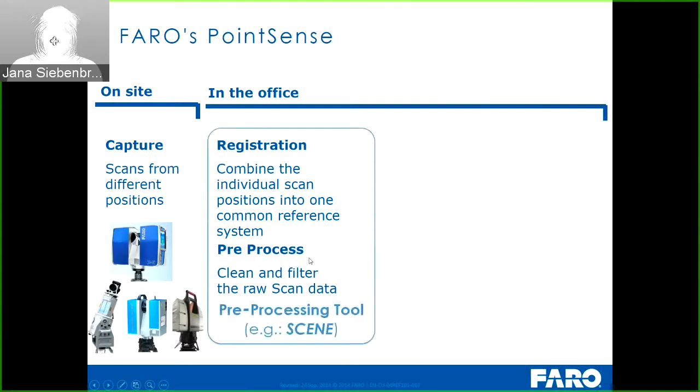So first, on site, you will capture scan data from different positions with all types of scanners, not only FARO scanners. If you're using PointSense Heritage, you may also collect your point clouds not only with laser scanners, but also with photo cameras. Relating to scans, you will in the office, or some may also already register their scans in the field. That means registration. You combine the individual scan positions into one common reference system, and also in the office you can pre-process the scan data. Pre-processing means that you clean and filter the raw scan data, and usually you would use a pre-processing tool like, for instance, FARO Scene to do so.

The post-processing means interpretation and modeling is usually done in a design tool like Revit or AutoCAD, and our PointSense is a plugin for AutoCAD. To get the data into AutoCAD and PointSense, you may directly export RCP or RCS files from FARO Scene, or you can also export E57 from any other scanner software. Or you can use Autodesk Recap in order to create RCP or RCS point cloud files from your scan data. So today we are talking about PointSense, so we are talking about interpretation and modeling of point clouds, not only from laser scans.

FARO offers various tastes or flavors of PointSense. There are some industry-specific PointSense products like PointSense Building for creation of 2D plans of buildings, like floor plans and section plans and elevations. Then we have PointSense Heritage, which combines laser scanning and photogrammetry and is mainly meant for people working in archaeology and preservation of historical sites. We do have a PointSense Plant, which will be covered in a separate webinar, as already mentioned.

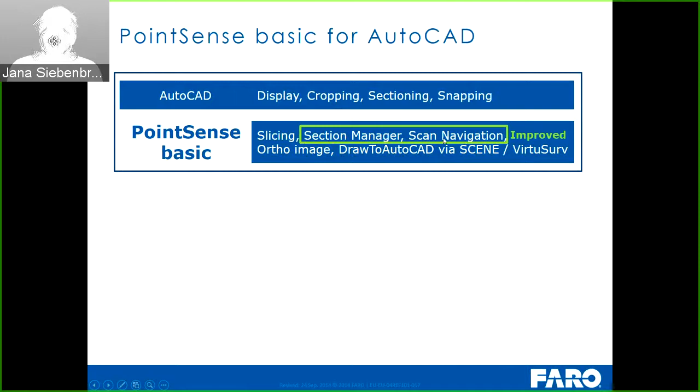We have in PointSense Pro some additional features for feature extraction, for lines, polygons, planes, cylinders, and we have also some analysis tools in PointSense Pro. And as new features, we have added to PointSense Pro the SmartSnap feature. You will learn about it in a few minutes. And we also added a fit profile feature and some deviation visualization.

And also in the industry solutions of PointSense for AutoCAD, in PointSense Building and PointSense Heritage, we added new tools. Those industry solutions contain the functionality of PointSense Basic and Pro, plus additional functionality, like here in PointSense Building, tools for creating 2D floor plans and elevations, to draw doors, windows, stairs, etc., and do some area calculation.

And as a new tool, we have a prototype for aligning wall lines. You will learn about this as well in this webinar. We also improved the tool for creating the wall lines themselves.

In PointSense Heritage, in addition to those PointSense Pro tools, you get tools for stereo photogrammetry and for creation of image plans by unwrapping colorized point clouds into the plane. You will learn about this tool also in this webinar. We did some improvements there. They are not new tools. We have them for quite a while now.

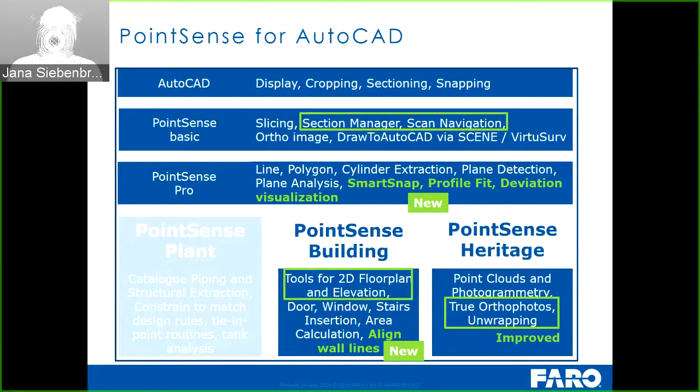It does not support AutoCAD LT because we are relying on the native point cloud engine of AutoCAD, and LT does not have such an engine. All right. So far about the brief overview. Let's have a look at the new features and their benefits for you.

The first feature I like to mention is the SmartSnap, which is really new in version 17.5. It works like the known AutoCAD object snaps. With it, you can precisely snap to planes, corners, and edges of a point cloud. And we also have options to snap to the highest or lowest point within a certain search radius. The benefit for you is that SmartSnap allows you to draw and model the as-is situation much easier. You have far fewer clicks for getting corners and edges.

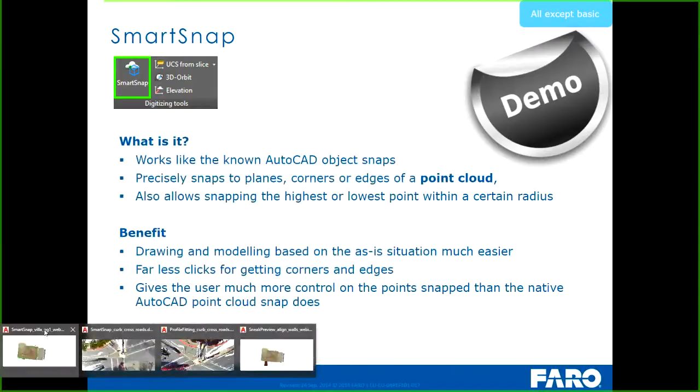It's nice to have this extra visualization to show you where the selected point is before you accept it as a point that you want to use. Yeah, right. And to give you a feeling for what the SmartSnap feature looks like, I'd like to demonstrate briefly directly inside AutoCAD. Okay, we switch to AutoCAD. So here you can see a point cloud, a scan of two rooms.

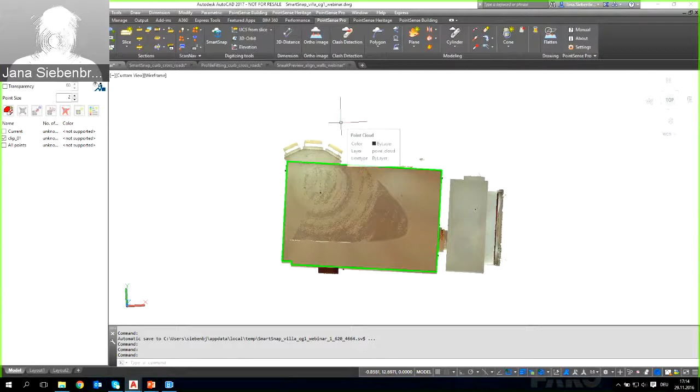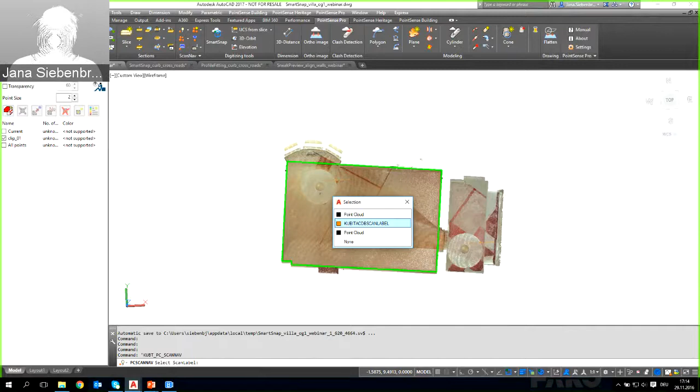I have already digitized the ceiling outline of the left room, and besides the SmartSnap tool I'd like to show you an improvement we made when switching to scan navigation. If I click on it, the point cloud becomes transparent, so it's far easier to click the scan label of the scan position I want to view in perspective. So here we have our scan data in the so-called scan navigation mode, where you look at your object from the scanner position. Now I'd like to digitize the outline of this window recess.

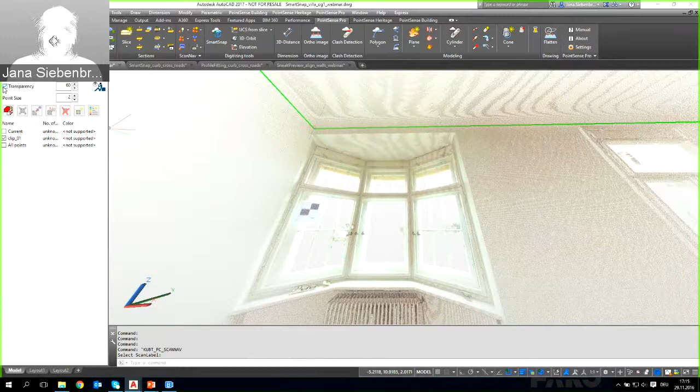One more thing I'd like to show you is a smaller improvement in the section manager, which some of you might know already. There you can turn on transparency whenever you need to. Here you can see the line that I have already digitized. For digitization of the recess, I will turn transparency off again, and I will start the new SmartSnap tool.

By running the tool, you will get an additional toolbar for the SmartSnap, where you can turn it on and off using this button. You can also change between auto mode and manual mode. We have different types of snapping modes, like point to plane, corner point, edges and corners, or only edge points, and highest and lowest. Let's digitize the recess using the edge and corner snap.

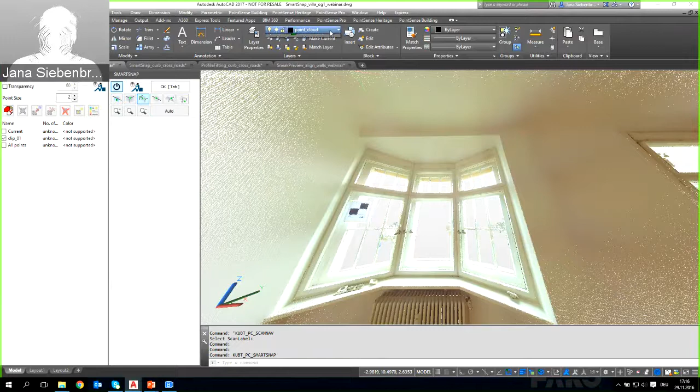I would just draw a line to outline the recess. Let me just enable a colorful layer, and I start the line command, and you can see at my cursor I now have a circle around my mouse cursor, which represents the search radius. I can scroll it smaller and larger, just to analyze the points within a certain area.

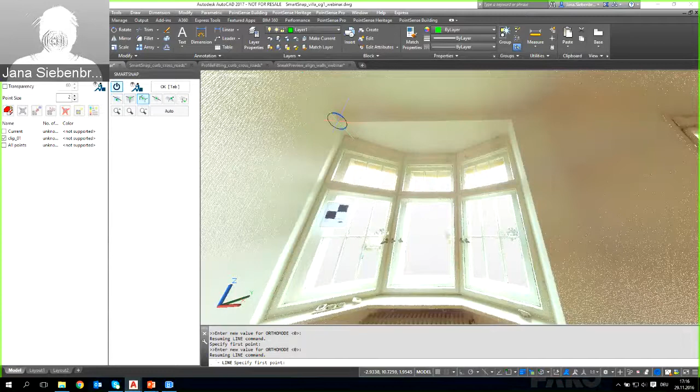And when I click near the edge or the corner point here, I get a visualization where I can check. The green point would be the point which I would get if I used auto mode, but the blue points show me some alternatives which I can check in 3 different views. I think this one looks quite good in all 3 views, and you get additional axes that help you judge the quality of the proposed point.

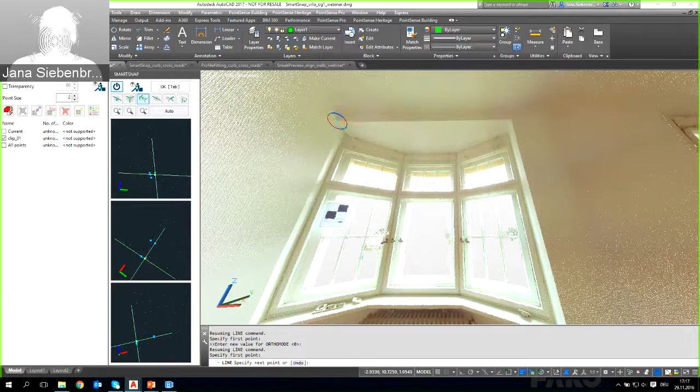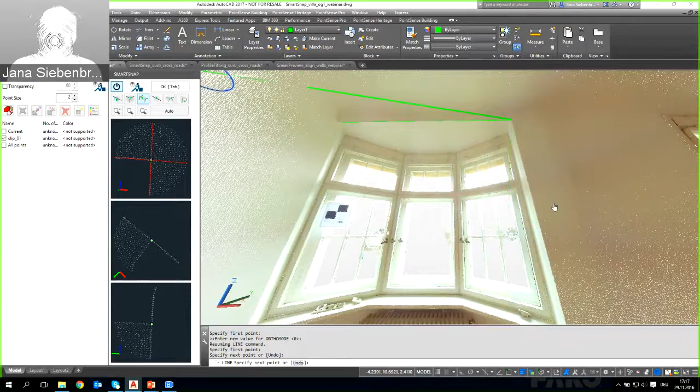And if I think this is the correct one, I can just click on OK or use the tab button on my keyboard, and you see the line was snapped to that point, and I proceed with the next corner over here. Again, we can check. To me, it looks pretty good already. Let's see how this looks. Well, maybe even better. So I confirm, and I could continue down here and see what happens.

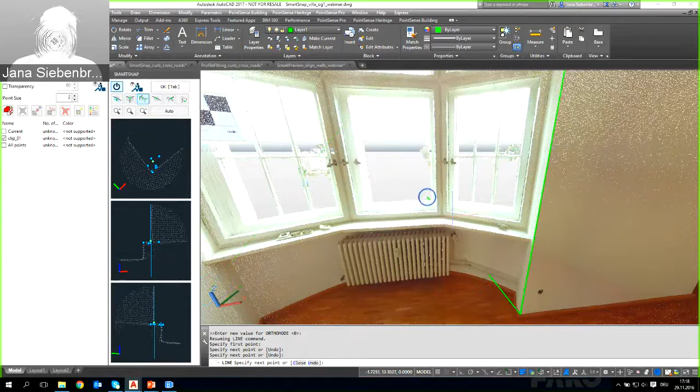This is a little bit more complicated situation down here, but still I would like to get a point very close to here. This looks okay to me, and I can confirm here. So I think you get an idea of the usefulness of the edge and corner point snap.

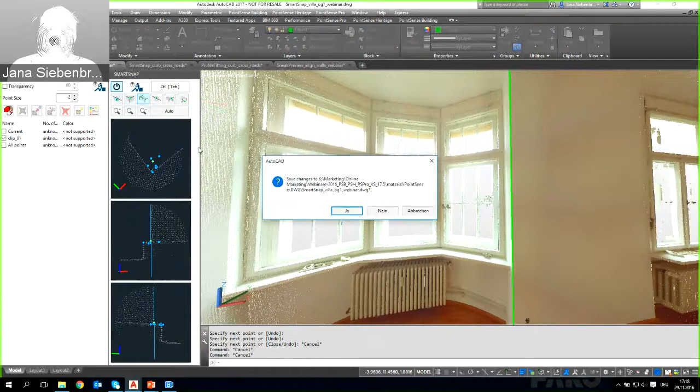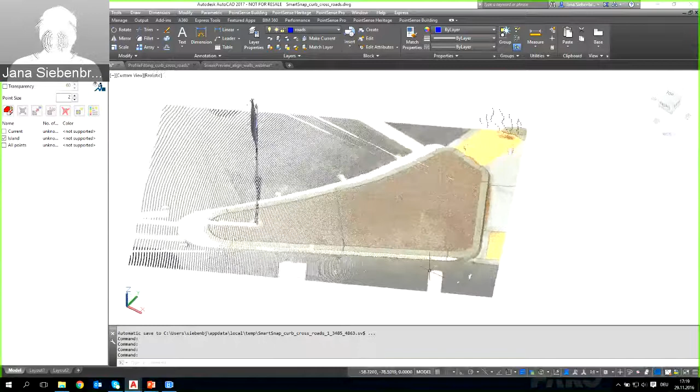Let me show you. We have 2 more options, like highest and lowest point snap. I will demonstrate these on a different example. Let me just close this drawing. Here we have scan data of a road cross section, and what I'd like to digitize is the bottom line of this curb using the SmartSnap. So I run the tool again.

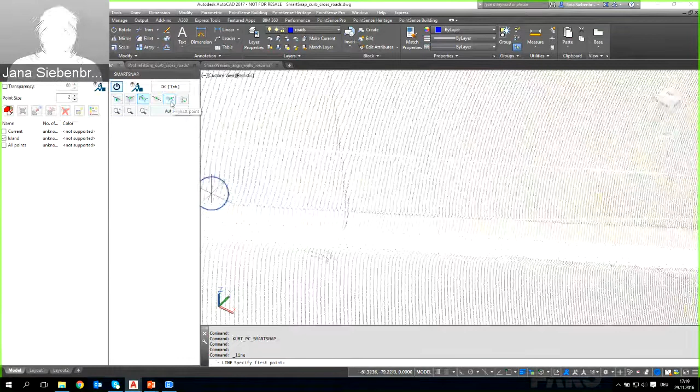I will start the line command once more, and I would need to snap to the lowest point within my search radius. So I enable the lowest point snap, and we have 2 options: the projected lowest point and the real lowest point. So now the projected lowest point is enabled, and this is also what I really need. Let me just increase the search radius a little bit.

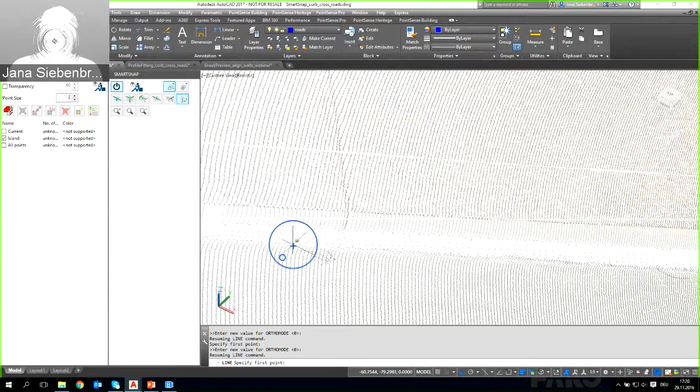You can see a small blue cross inside my search radius, and you can also see a little circle. The little circle shows me the point with the lowest Z value within my search radius, while the blue cross shows me the point where I get my XY coordinates from. So I get the Z coordinate from the point with the small circle, and the XY coordinate from the point with the cross. So I can start drawing along here.

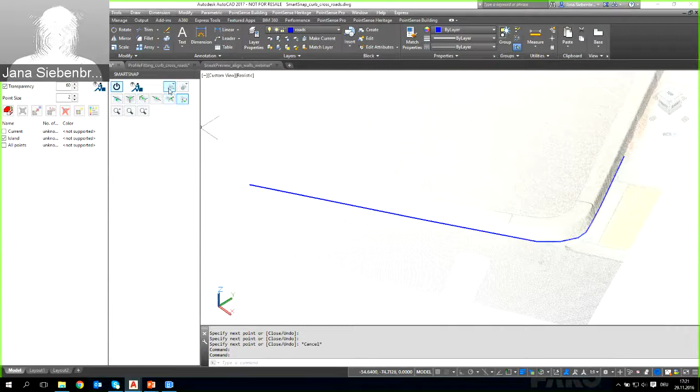Oops, I want to pan. Just click roughly around this corner. Quite straight on over here. Okay, I think that's enough for you to get the idea. We turn it a little bit more transparent, so you can see how easy it is to draw the bottom line of a curb. The same way I could do with the top of the curb using the highest point snap, projected highest point.

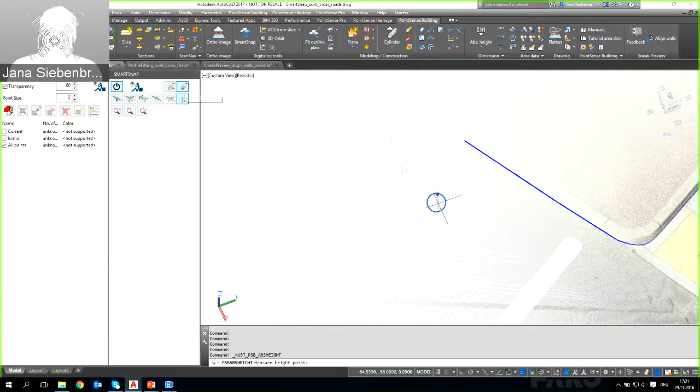I'd also like to show you how you can use the other mode, with the real lowest point. If you for instance want to know in a certain area of the road where the water will run to, you can, for instance from PointSense Building, start the labeling tool for heights or elevations, and with the SmartSnap real lowest point enabled, you can see that the symbol changes a little bit.

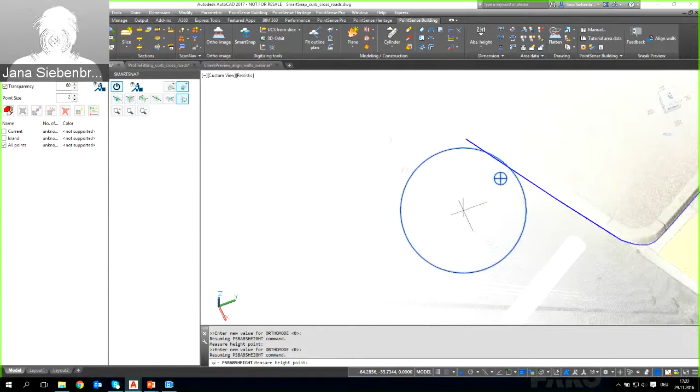The small blue cross is directly inside the small blue circle, which means that you get the X and Y as well as the Z coordinate from the lowest point within that larger search radius. So if I want to analyze a larger area, I can enlarge the search radius, and my height annotation will be put to that snap point.

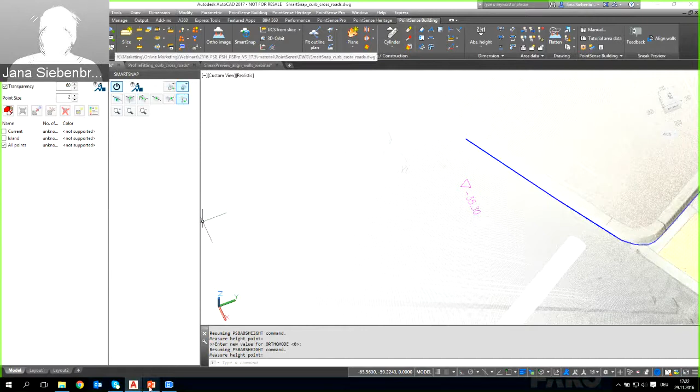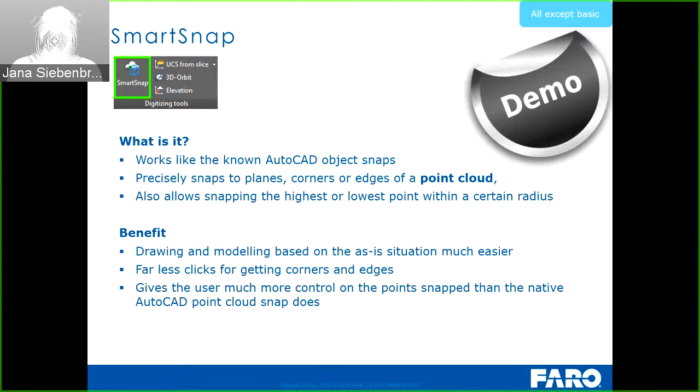Okay, I think that should give you an idea of the SmartSnap tool. I will just continue with the next feature, which is also new in version 17.5 of PointSense. It's included in all PointSense solutions except PointSense Basic.

It does fit 3D profiles along a point cloud, and shall help you model all types of profiles in 3D, like the 3D model of a curb or of ornaments, or even steel beams that bend. You can model those beams with this tool as well.

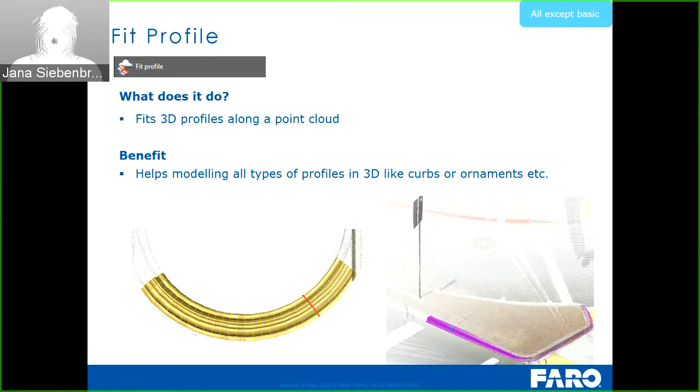Yes, I was going to mention the steel beams if you didn't. I had a customer that needed that, and it worked very well for them. Yet another application where I found it useful was digitizing railway ties. We had a customer with an electrical substation with train tracks going through, and we were able to model it very well with this tool. Ah, cool. Good.

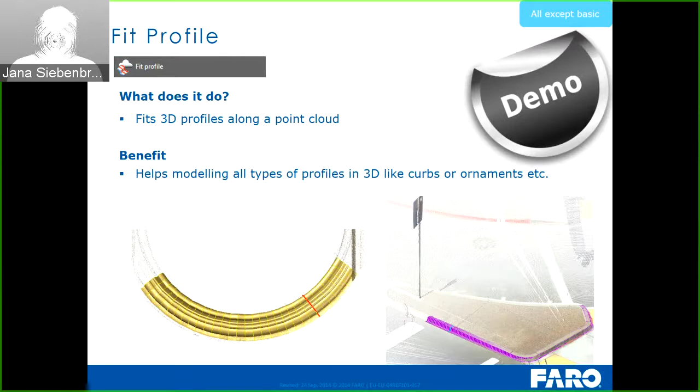So I will just go back to AutoCAD to give you a brief introduction to that tool. It's really easy to use.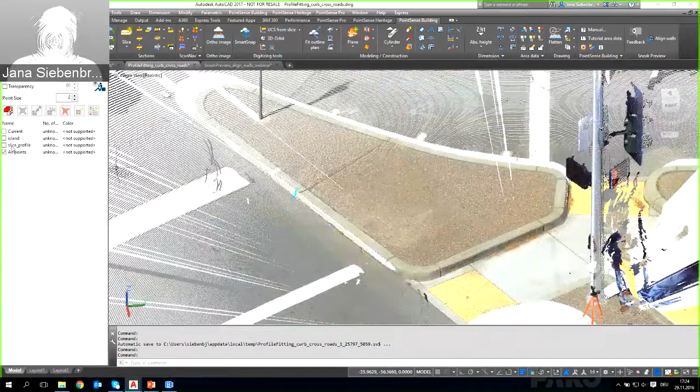In here, it's the same road cross section example, but this time we don't want just the lines of the curb, we want to model this curb in 3D. What I did in preparation was create a slice through the point cloud and digitize the profile, the cross-section profile of the curb. That's what you need before you start.

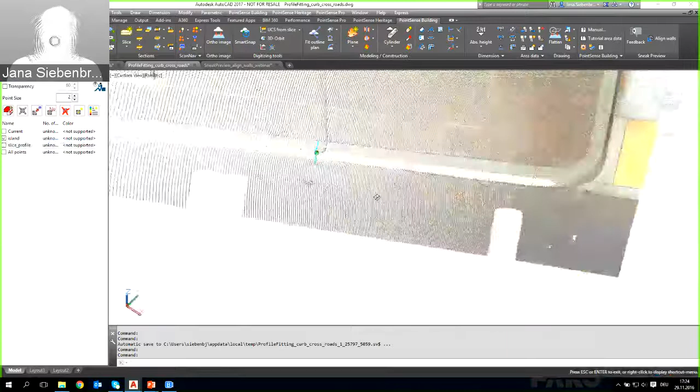Having prepared this, I can run this command in PointSense Building. You find it here. In PointSense Pro, it's hidden in this pull-down menu. The dialog works a bit like a wizard, so the first thing you have to do is select the cross-section profile. Here you have a small sketch that helps you understand what's being asked.

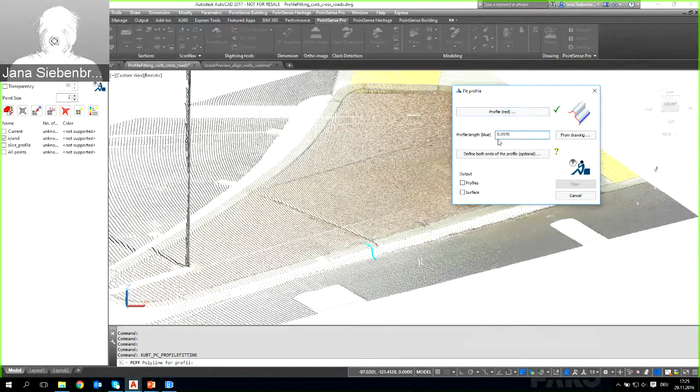As soon as I've selected the profile, we're back in the dialog with a check mark here. The profile length is a parameter where you can control the fitting accuracy. The smaller the profile length, the better you get around curved parts of the 3D profile, like this curved part of the curb. I would just leave it as it is, given by the software in relation to the red cross-section profile.

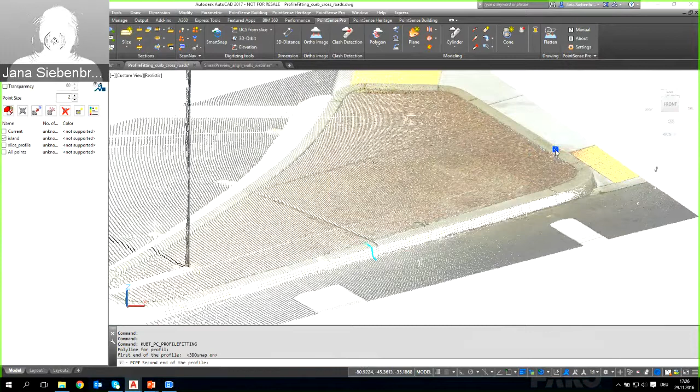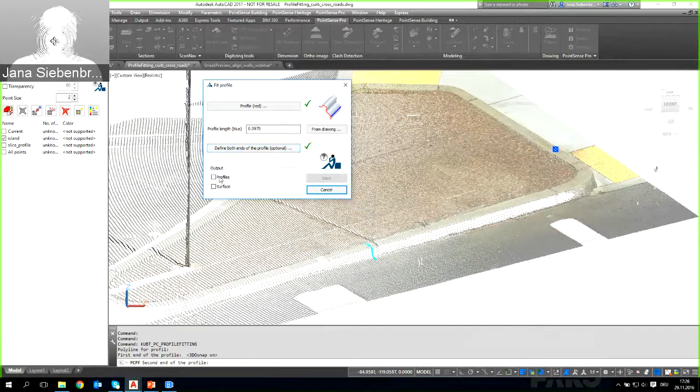What you can also do is define ends of the resulting 3D profile. You can snap a point cloud starting point here and an end point over there. If you don't define an end point and starting point, the tool will just go along the point cloud as far as it finds an area where the profile might fit, and you can stop the fitting by pressing escape at any time.

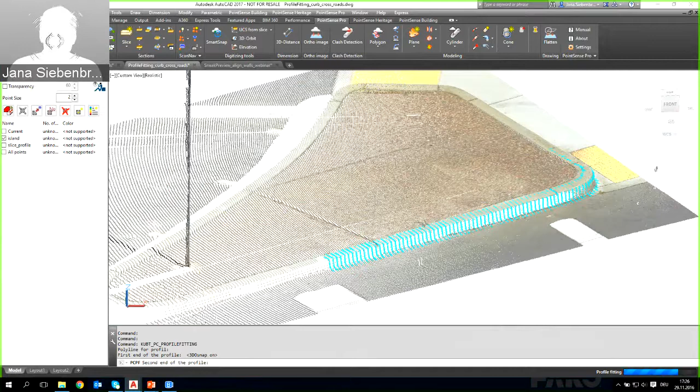The output we want to create, for demonstration here, is profile lines as well as the final 3D surface. I just click start, and you can see this is really real time—the profiles are fitted very quickly. It starts in one direction, and once it reaches the endpoint, somewhere around the corner there, it will continue to the other direction of the selected cross section.

Now I'm asked to delete any profiles which I don't need. I could select some profiles over here which I don't want to use to create the 3D surface. In this example, all the cross sections fit very nicely, so I could keep them. But in some cases, if you don't define a start and end point, additional profiles might be created that you don't want to use for creating the surface. Therefore, we have this option to delete some of the profile lines.

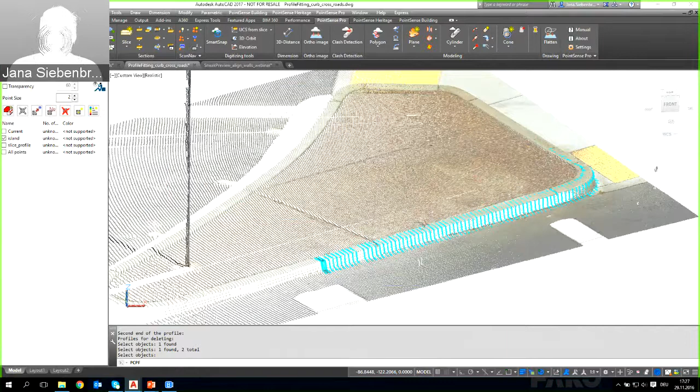And now you see this was also real time. In just a few seconds, the tool creates a 3D surface from all these profiles, and you have the curb in 3D. All right.

I will not demonstrate this tool, it's pretty easy. You just select the surface, the geometry objects that represent the surface, and then select the point cloud, and it calculates a new point cloud which is then colorized by deviations, and you get a legend in the end. It's very similar to our existing planar analysis tools, and the results are pretty much the same. But what I like about it is that you can model anything you want or need in the point cloud, and then compare that model to the point cloud.

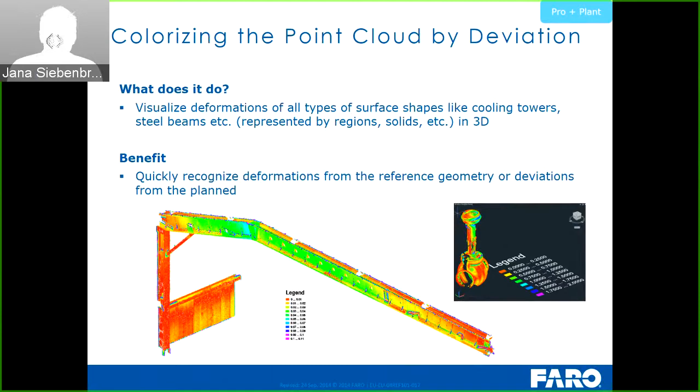Another one of the completely new features in PointSense is the Align Walls feature, which we only have in PointSense Building. And so far, this feature is just a prototype.

In PointSense Building, we introduced a new feature group called Sneak Preview. This is a category collecting prototype features we think are good enough to let you try them and give us feedback. The sneak preview features are your chance to participate in early developments at FARO in PointSense, benefit early from new developments, and influence the future functionality by your feedback. That's mainly what the new sneak preview is.

The first tool we've added to the sneak preview group is Align Walls. As the name suggests, it's intelligent automatic alignment of wall lines inside floor plans. Your benefit is that you get quickly architectural type plans with parallel wall lines and rooms with square corners, and also rooms and walls that are axially aligned.

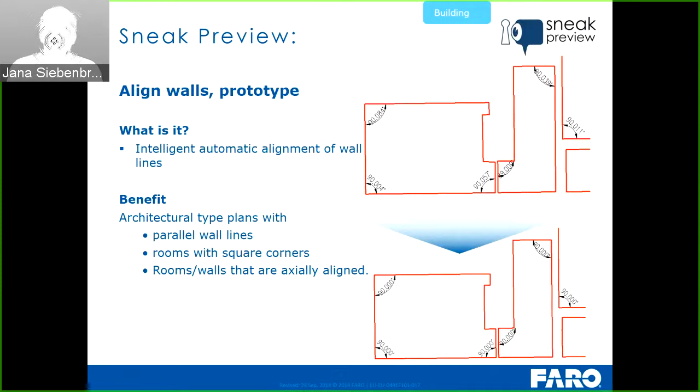The tool works as follows: first you select all the lines that you want to align or make perpendicular, and the tool analyzes those lines and polylines and determines the reference directions, then aligns the lines with these reference directions within a customizable tolerance.

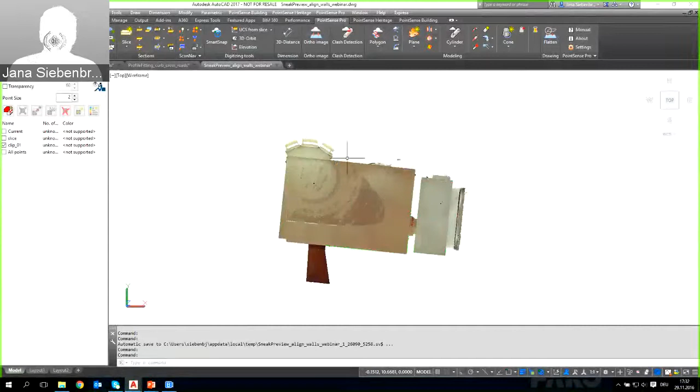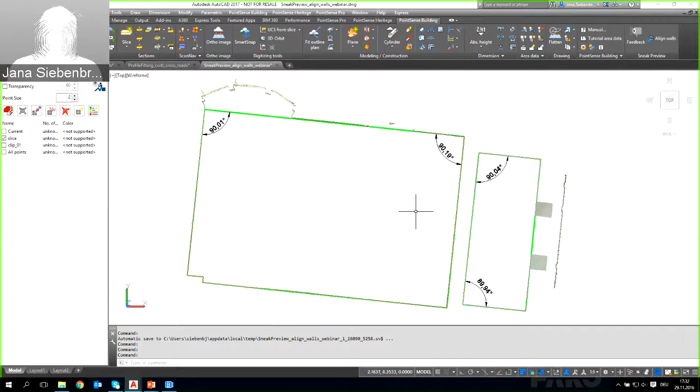Best to give you an idea of the tool with a demonstration. We go back to AutoCAD here. We have our two scanned rooms, and the workflow would be that you first create a slice of your point cloud and digitize the wall lines. Before you add doors and windows, you would want to align the wall lines and apply constraints like square corners for the rooms, and that's what we can do.

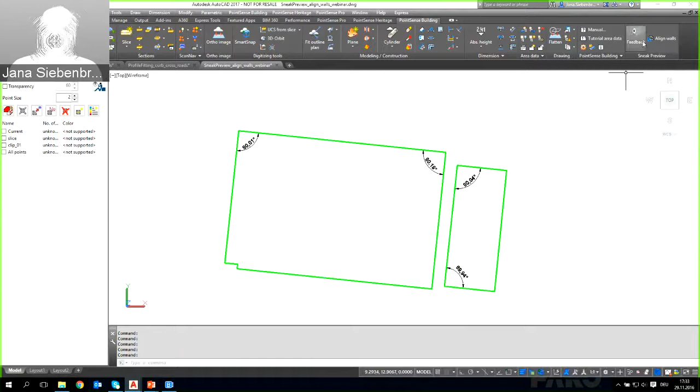I have put in some annotations here, and you can see the room corners are not square right now. Using the new Align Walls tool, you select those lines, press enter to confirm the selection, and then you can set increment angles for the alignment. The default is 90 degrees, but you could also apply constraints like 45 degree angles between the wall lines.

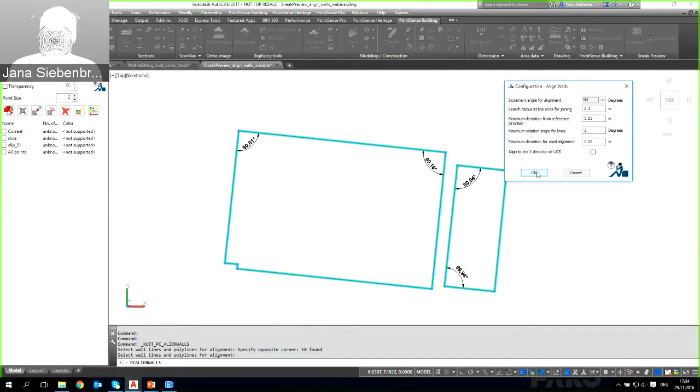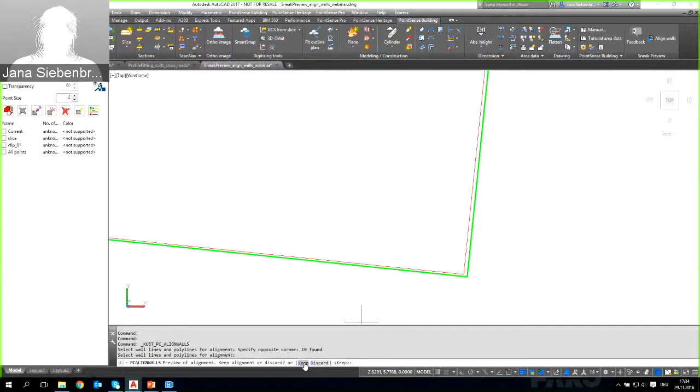You have various parameters to adjust the wall alignment, like the maximum deviation for axial alignment of wall lines, which is especially of interest if you have outer scans of the outer side of a building's wall, for instance. I'll just hit OK here, and in the command line you're then asked - in the drawing you'll see the proposed adjusted lines in red, and you have the option to keep or discard them. I want to keep them, of course, and you can see now we have new lines.

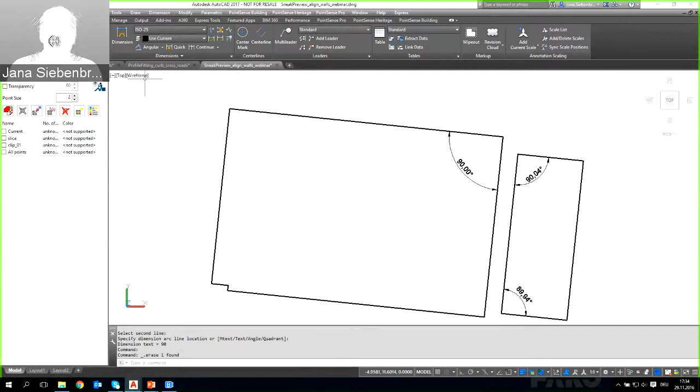They are black. Let me delete the annotation over here, go to annotate, and put in the new angular annotation, and you can see this corner is square now, as well as this one over here. Same with all the other corners. I will not put the annotations in here. So this is mainly what this tool does.

After applying these constraints, you can continue adding doors or windows or even stairs, depending on what you need inside your floor plan.

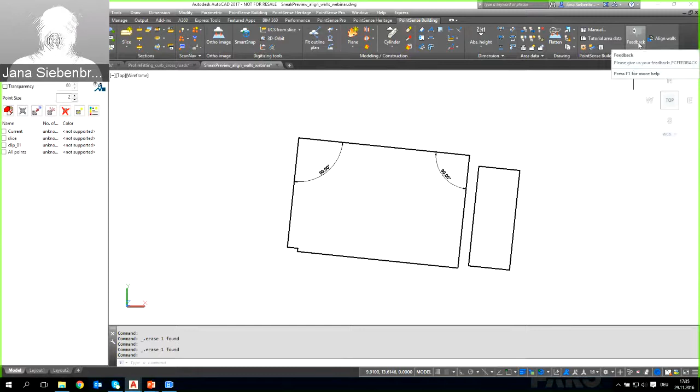With the new sneak preview, you also have the option to give feedback. Let me show you this briefly. If you hit the feedback button, you'll get to a web page where you can leave your feedback on the particular sneak preview feature. For now, we only have the Align Wall Lines feature where you can give feedback on.

What else have we done to improve PointSense?

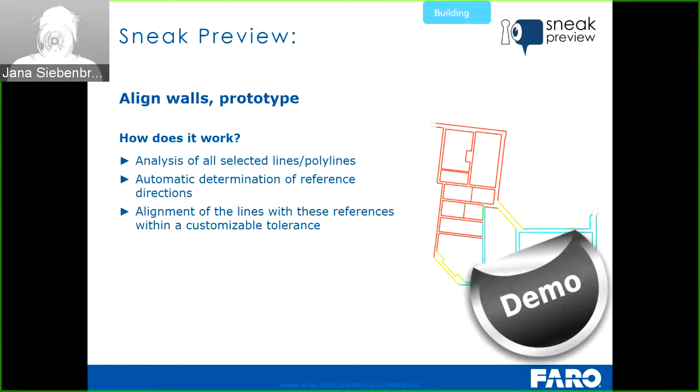We improved PointSense Heritage, specifically the creation of image plans. For unwinding point clouds and images and the calculation of true orthophotos, we have increased the speed - the calculations were quite slow before. You also need fewer clicks because we now directly support RCP and RCS point clouds - you don't have to create a smart section first, you can directly select your RCP file to unwind it. Also the visual quality of the results has been improved.

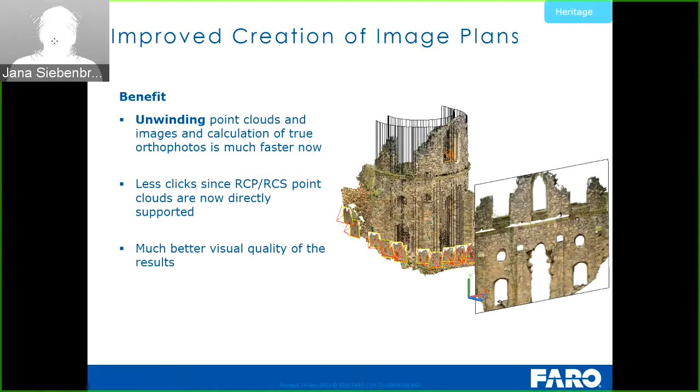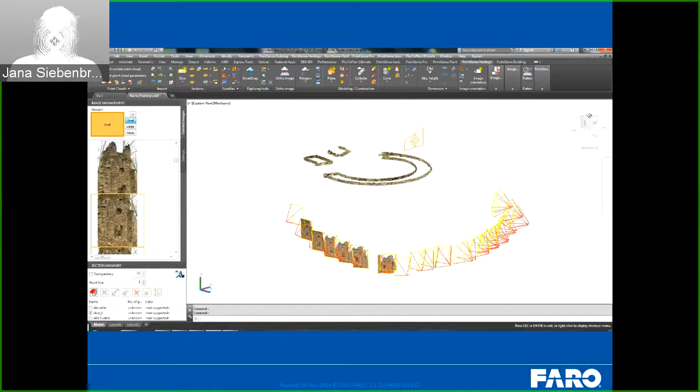Because calculation still takes longer than one or two minutes, I've prepared a video to give you an idea of how the unwinding feature works. Some of you might already know it. Before you can unwind anything, you have to create a projection surface for the photographs or for the points of the colored point cloud. So we defined a slice and fit a polyline to this point cloud slice.

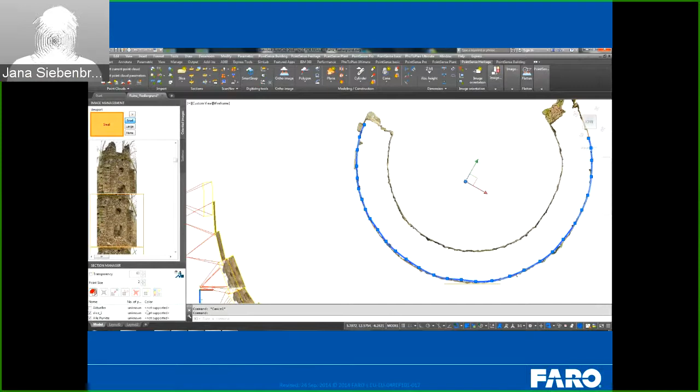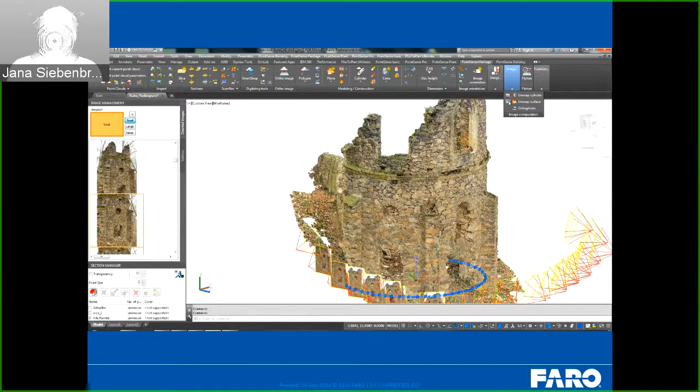This is in time-lapse mode. Once we fitted the polyline, we can use this to create a 3D surface from a 2D polyline using a PointSense Heritage tool called Edit Prismatic Surface. So we select the polyline, click an upper and lower point, and we have the projection surface.

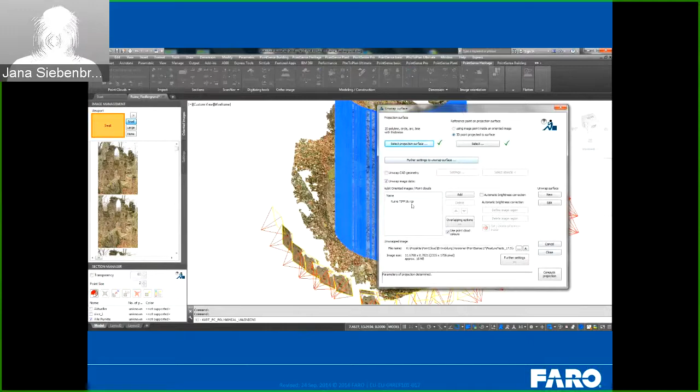Then we can run the Unwrap Surface command from PointSense Heritage. You need to select the projection surface - that's been done here already - and you can see the RCP point cloud has been selected. When you run the calculation, you get a result like this, which looks pretty good, I think. Having created a true-to-scale, true-to-length image plan, you can of course use AutoCAD tools to annotate, do measurements, and maybe draw a vectorized facade plan on top.

Another improvement, which I already demonstrated when I talked about SmartSnap, is that in our section manager we now have a transparency option and also an option to change the point size without needing to select the point cloud explicitly. You can turn the point cloud on, transparency on and off while you are drawing and modeling, and this helps a lot with modeling. It's much faster to have the tools right there on the side of your model space, and be able to change that in the middle of any command without breaking the command.

Another improvement with the help of transparency, which I already demonstrated, is when you want to turn on scan navigation, the point cloud automatically gets temporarily transparent, so you can much more easily select the scan labels of the scan positions.

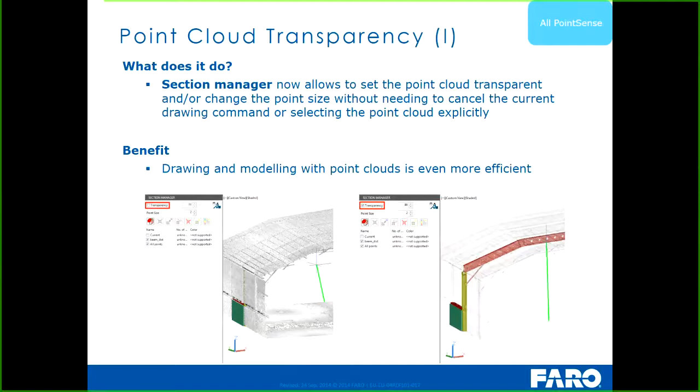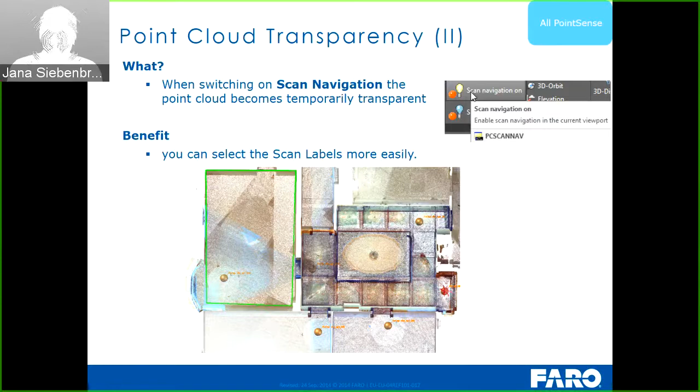We also now have the possibility to explode the scan labels, for users that for any reason need a scan map. For somebody who doesn't have PointSense inside AutoCAD, or who is using a different CAD like BricsCAD, and you want to provide them with a map of the scan positions, you can create the scan positions in PointSense and then explode them and export the DWG or DXF file with the labels represented as standard CAD geometry.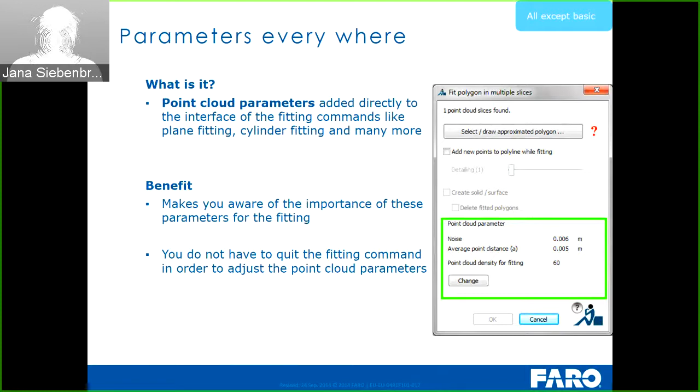Another improvement we've done to PointSense is that we put the point cloud parameters directly into the fitting and pattern recognition tools, like plane fitting, cylinder fitting, and many more fitting commands. You'll have the point cloud parameters directly in there. It helps you be more aware that these point cloud parameters matter for the fitting results, and you don't have to leave the fitting tool if you feel like you need to adjust the point cloud parameters for a certain area you're working on. You can adjust those parameters directly from inside your fitting tool, which is quite handy.

We also revised and improved the old fit outline plan command. This is a command that helps you draw the outlines of walls with the help of point cloud sections, point cloud slices. But not only with point cloud slices - now it's also possible to draw wall outlines with the help of scan navigation. It offers more options, like forced perpendicular or 45-degree wall lines, and works more efficiently. If you try it out, you'll recognize you need far fewer clicks than in the previous version of this tool.

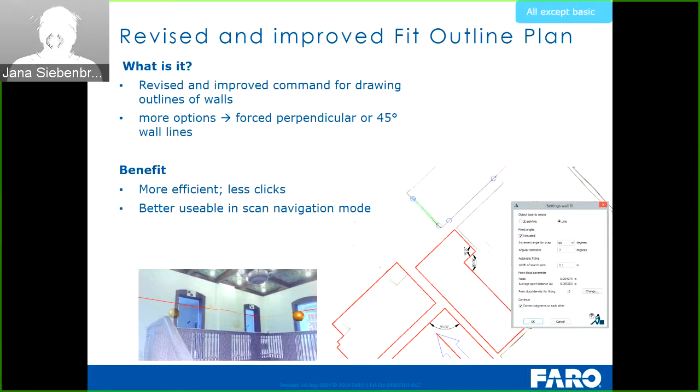On user request, we also made various improvements to our analyzer tools, like the plane analyzer. You'll now find options for labeling the highest and lowest deviating point from a reference surface, which you can see in this cyan colored annotation. We also added a checkbox in the dialog for the square grid, so you don't need to enter two grid lengths, just one, if you want square cells for your analyzer grid. Also new are green and yellow labels for the rows and columns of the grid, which correspond to the cell numbers in the ASCII file you can export with the analyzer tool - these labels help you better find correspondences within the deviation table from the ASCII file.

This is a great improvement to help find or tie in data that's outside of CAD, perhaps in an Excel file, and help engineers find out physically where that would be, let's say on a wall surface. Very helpful in the paneling industry, also good for any sort of flatness analysis like concrete analysis.

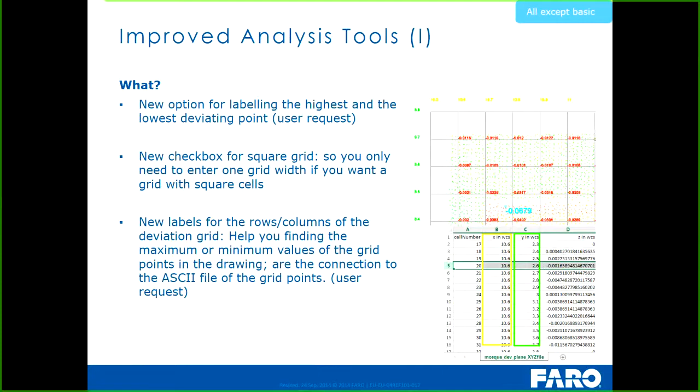Another improvement in the analyzer tool is that we now provide the option to organize your results more easily. We've prepared configuration tools to define layers to put the different analysis results on, and you can define the names of those layers where the grid, points, or lines, etc. shall be put.

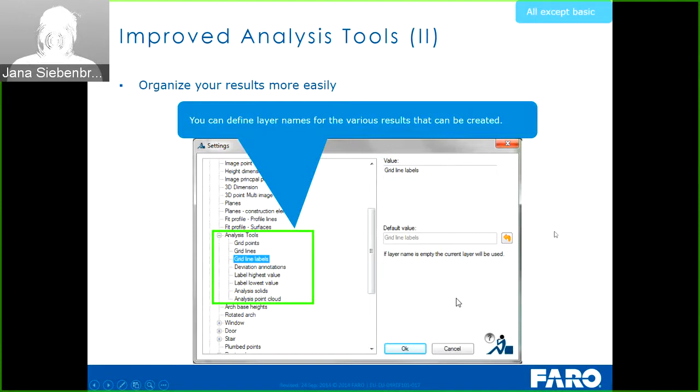Then we've made some improvements on user requests to two of the plane tools: the fitting tool for one-click planes, and the automatic grow tool.

We have included two new command line options that help to change the search radius around the click point without needing to go into the parameter dialog. And inside the parameter dialog, we added options for limited and unlimited plane over here, which makes the tool a little bit more flexible on the results created. And another thing we added is the option to create or not create sections when you use these tools.

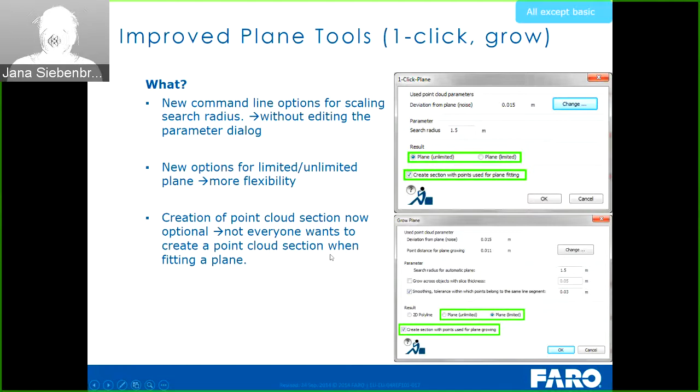Previously, we did not have the option. Both tools always created point cloud sections in the section manager, and if you use the tools very often, the section manager could become very crowded. So if you don't want those sections to be created, you can now uncheck this option, and your section manager will stay clean and uncrowded.

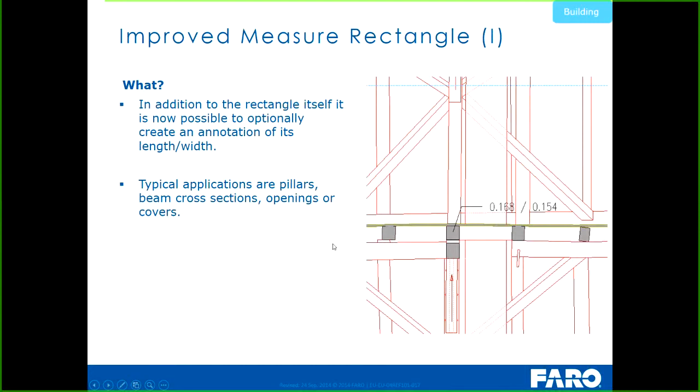Then, in PointSense Building, we did some improvements to the tool for measuring rectangles. So now, in addition to the rectangle itself, you can create annotations of the width and the length of that rectangle you created, which comes quite handy when you draw pillars or beam cross sections or openings or covers or anything which is rectangular. Okay, those were the features which I wanted to introduce to you today.

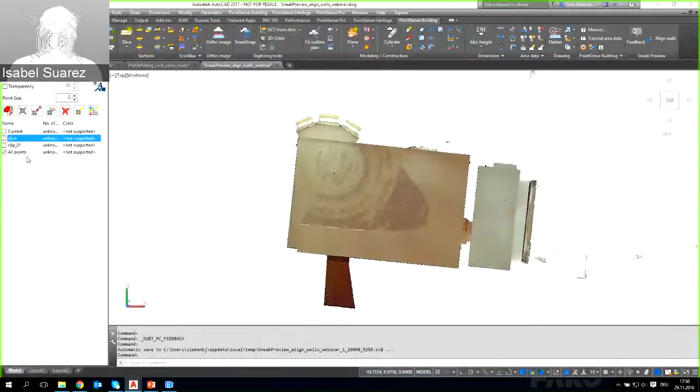May I see an example of multiple slice? Multiple slice. It wasn't one of the new features, it's one of the existing tools. I believe we have a video of that online, but if you want to show it, you can, or we can send a video. Yeah, I think it's easiest to send a video, but multiple slice. Let me just go to the clip here. And multiple slice is hidden in the drop down over here.

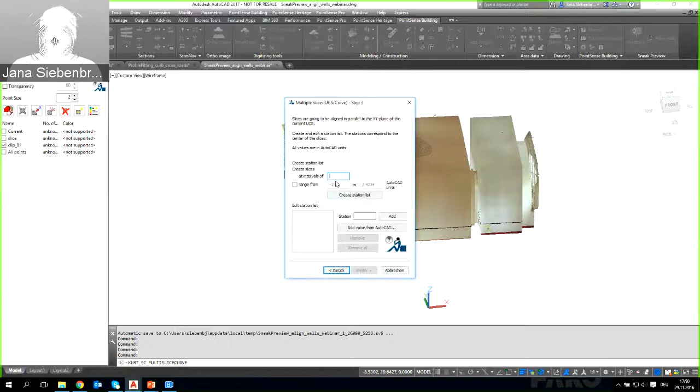And you can decide whether to apply it on the visible section only, and we will just create multiple slices parallel to the XY plane for demonstration here. And we can add intervals, to make it not too many, let's say 0.5 meter, or maybe just 1 meter, to give you an idea of how it's working. Create a station list. Can even adjust things here.

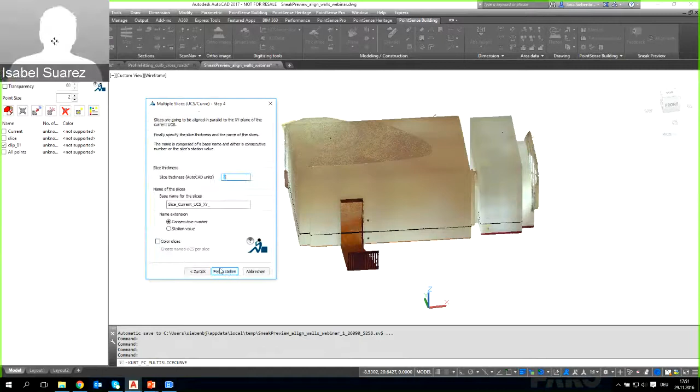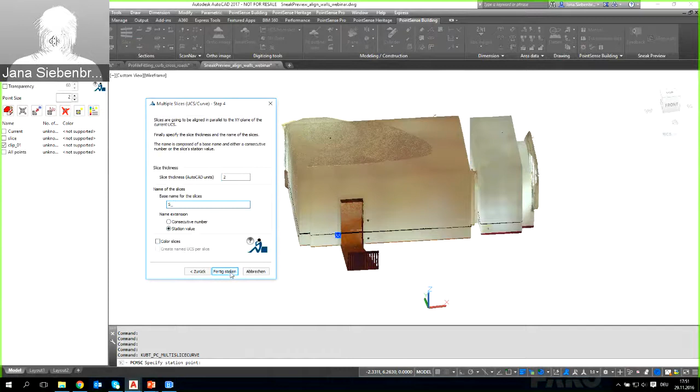Or add specific elevations. If you wanted to know a specific elevation, like at a counter height or something, you could type that in there. Like here, yes. Or pick it from CAD, like over here. Okay, then it's added in here. Now you can continue, and you can name the slices by station value, which I usually select. And we don't color the slices here. I think point cloud color is fine. And then I'll just click on finish, and it should not take too long to create.

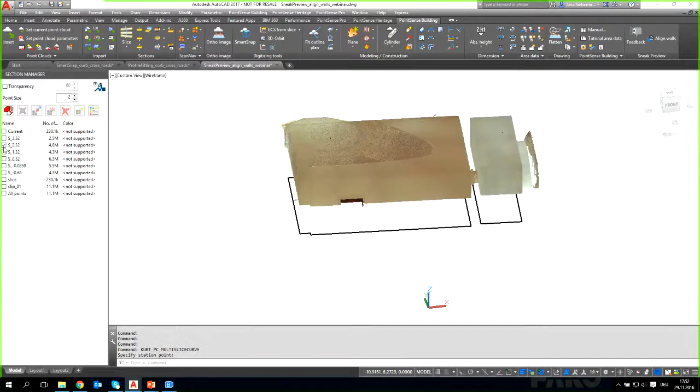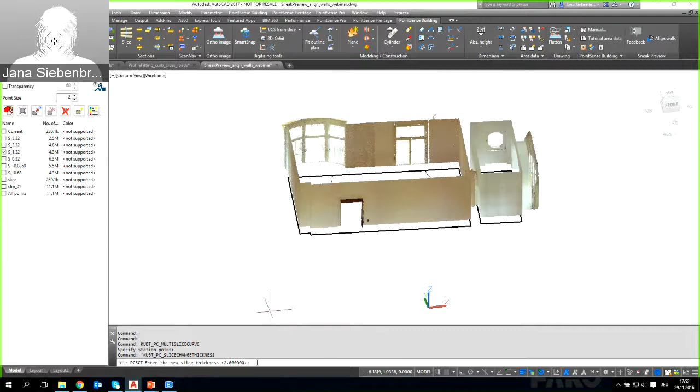How many was it? 6 or 8 slices, yeah. So we have them over here. Oops, there you go. I think just because the interval was the same as the thickness. Okay, I didn't modify the thickness over here. That's why it's so thick. But you could always reduce the thickness going in here. Yeah, it was 2 meters thickness. That's far too thick. I think you got the idea of the multiple slice tool. Okay.